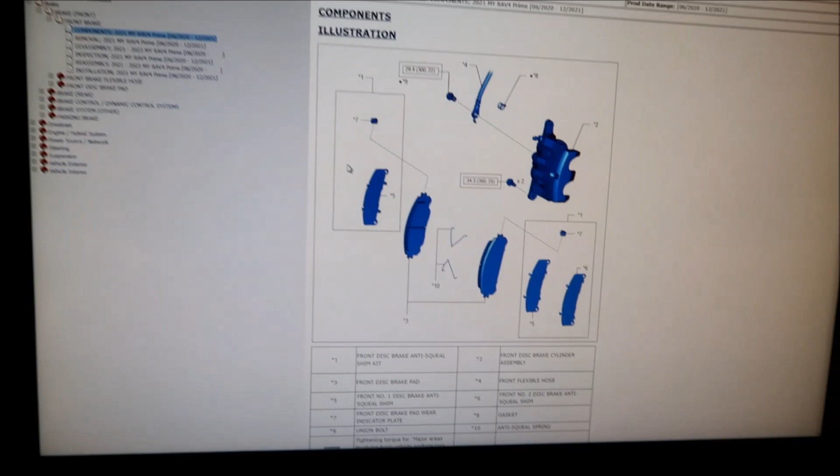I'm here in the Toyota TECHINFO website. So what I did is I did a 2-day subscription, alright, the most basic one. A 2-day subscription is like $20, about the price of maybe a Haynes or Chilton's book. And in my opinion, it's totally worth it if you take advantage of it.

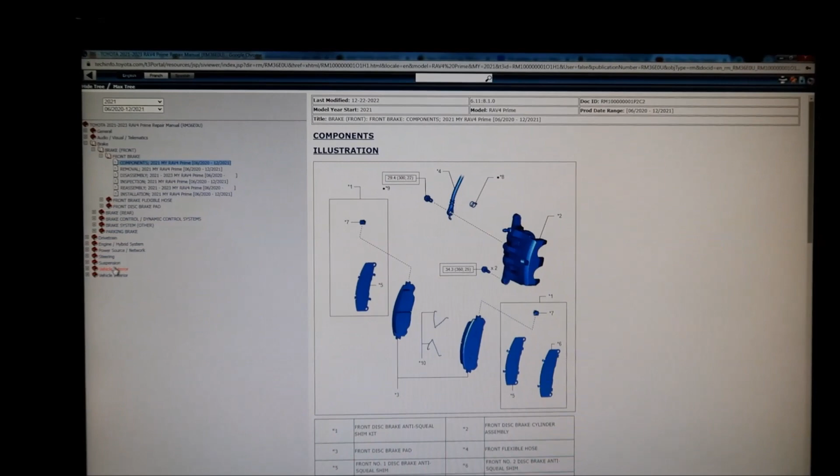Okay, so this is the repair manual for the RAV4 Prime. Right now I'm looking at the brake section - it just says brake, alright. So it's in the manual, in the brake chapter. So this is kind of how the repair manual works.

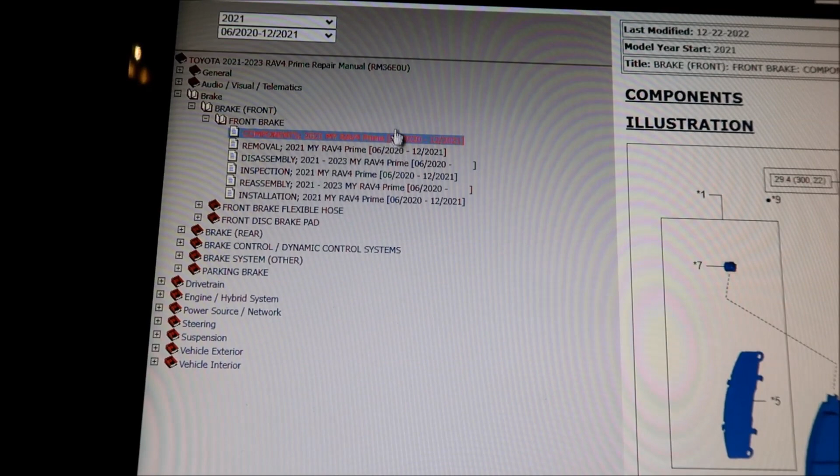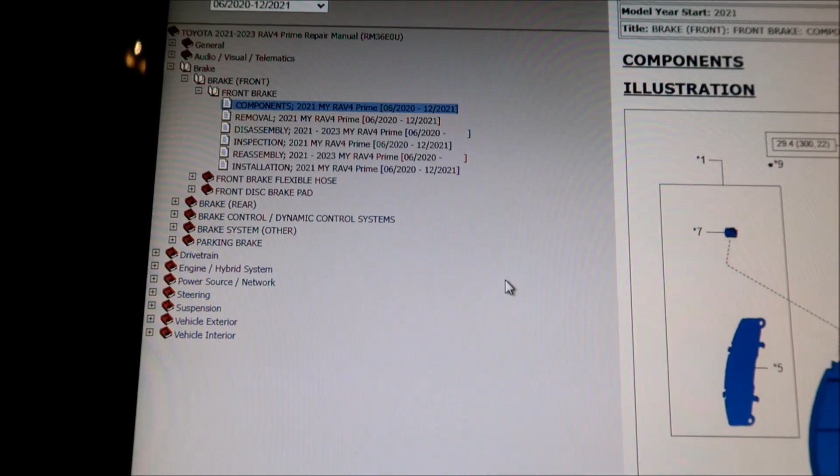So there's technical service bulletins, like supplemental manuals they made after they make this stuff. It also tells you from what years and stuff. So I'm logged into the 2021 model year RAV4 Prime, and that kind of goes from like the SE and the XSE premium package. There's a lot of stuff in here that, since I have the SE model, there's some stuff I don't have - like navigation, I don't have any of that stuff in there.

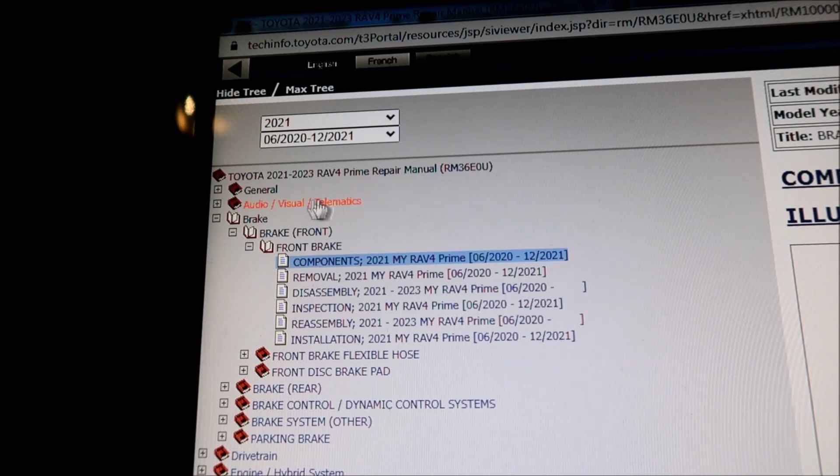But anyway, this is kind of how the manual works. It says Toyota 2021 to 2023 RAV4 Prime Repair Manual, that's where I'm at right now. They've got different tables of contents, very similar to a book. There's general, audio - so far I've gone through general, audio, and now I'm in the brake section. So I'm looking at the front brakes right now, and when you click on front brakes, generally it'll have components, removal.

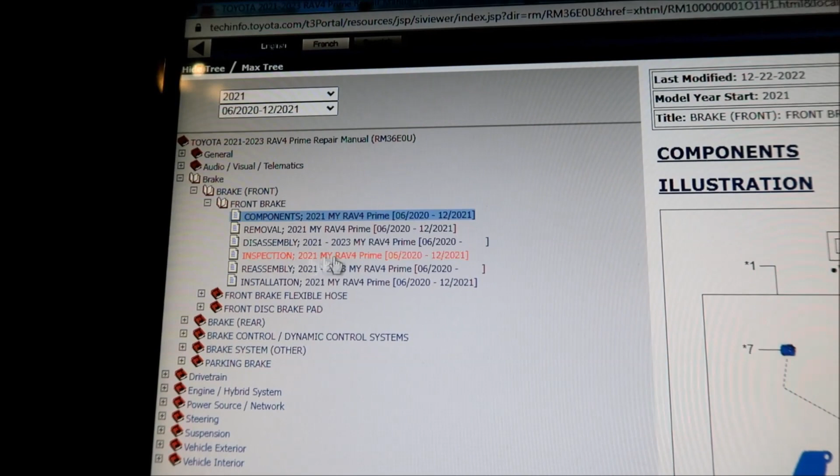Okay, this one has disassembly because you're going to take the calipers apart, and what the inspection is. Usually most of the stuff has three pages to it. One will be components, then the next will be removal, and the next will be installation, and there might be something like inspection. Okay, so let's go take a look at the front brake one.

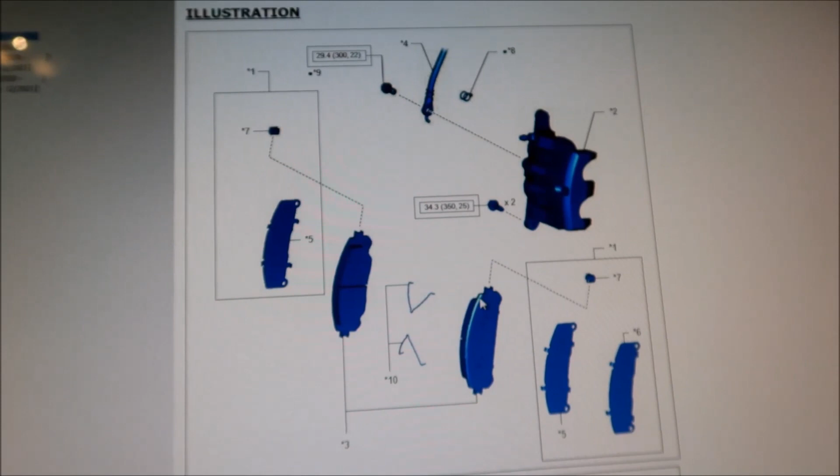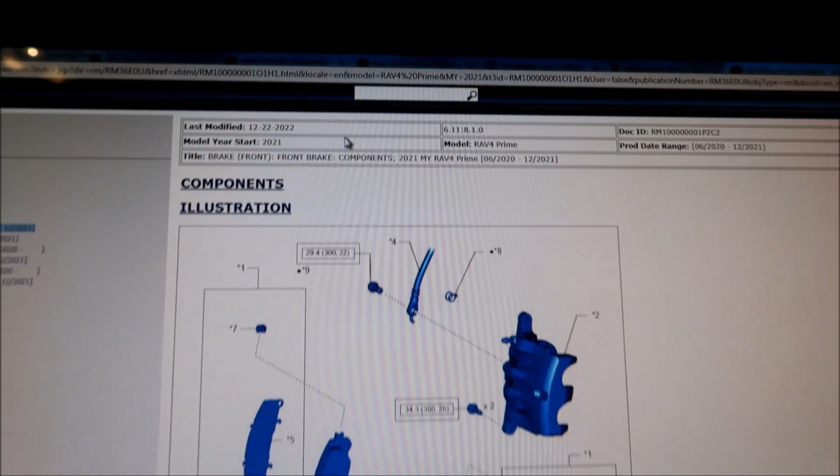So yeah, it has all the information about this, the page and everything. This was last modified on the 22nd of December 2022, like a month ago. Wow, I'm surprised, because I have the 2021 model. And here they've got pictures of the caliper. All right, nice, it's in blue.

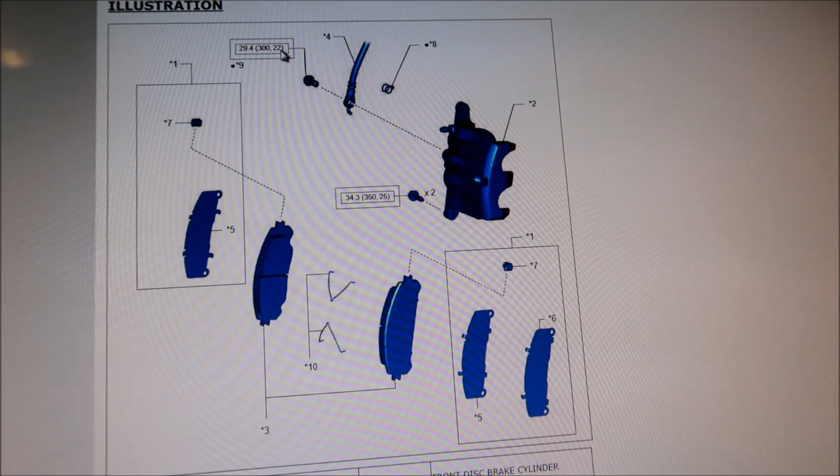It's interesting. So here we got the brake line, here's the brake caliper, and then here's the banjo bolt. All right, so then they have the torque spec right here. They've got it in three different torques, and I believe the one on the far right here is foot-pounds, and I think Newton meters is this one, and this one is some funky one. It tells you here somewhere.

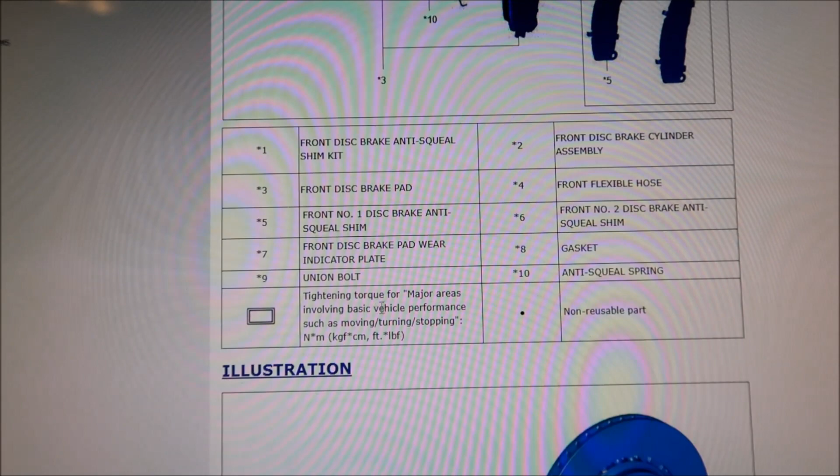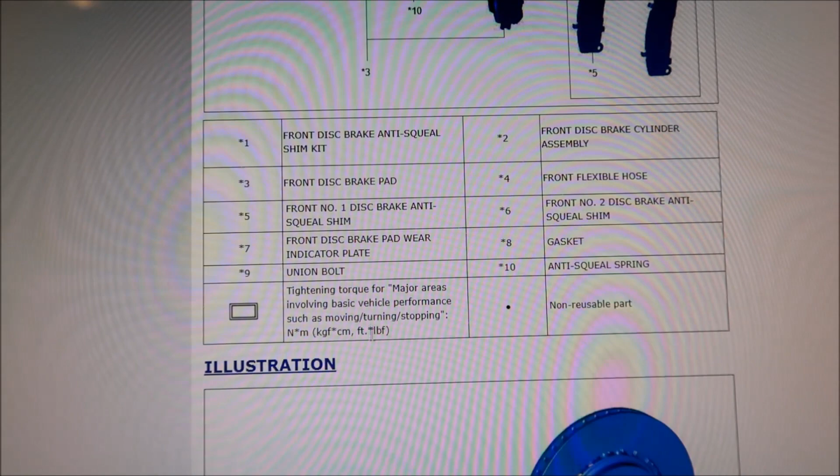Oh, right here. Tightening torque for major areas involving basic vehicle performance such as moving, turning, stopping. Anyway, the first number is Newton meters, the second is kgf. What's this? I don't know what that is - kgf-cm, some kind of weird unit. And then foot-pounds. In America we use foot-pounds and Newton meters, and inch-pounds if it's really small. Yep, there we go, that's the info I'm looking for.

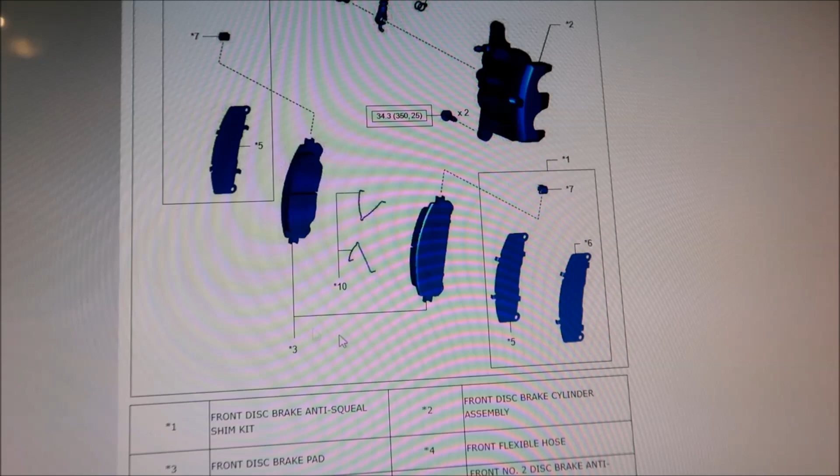And it's got a picture, and it's kind of got where everything is supposed to go. That's the banjo bolt, these are the caliper bracket bolts right here, these are the shims, and these are the brake pads. So pretty cool. And here we got one of the disc brakes. There's the caliper pins. These are the little - what are these, number 5? It's called a front disc brake pad support.

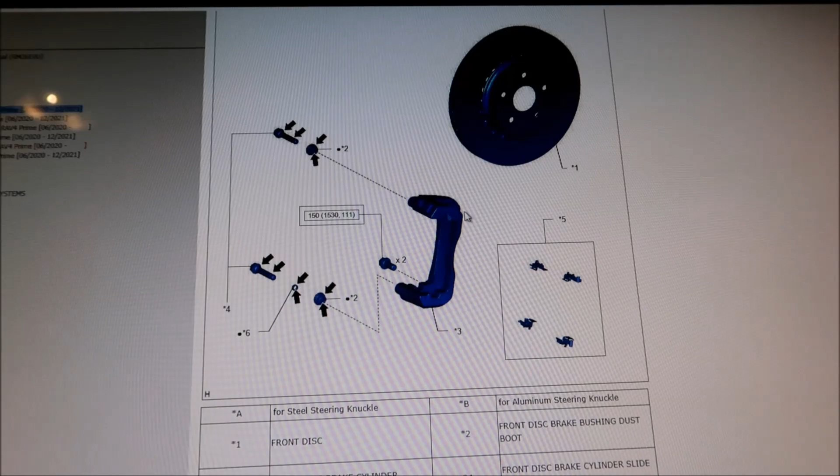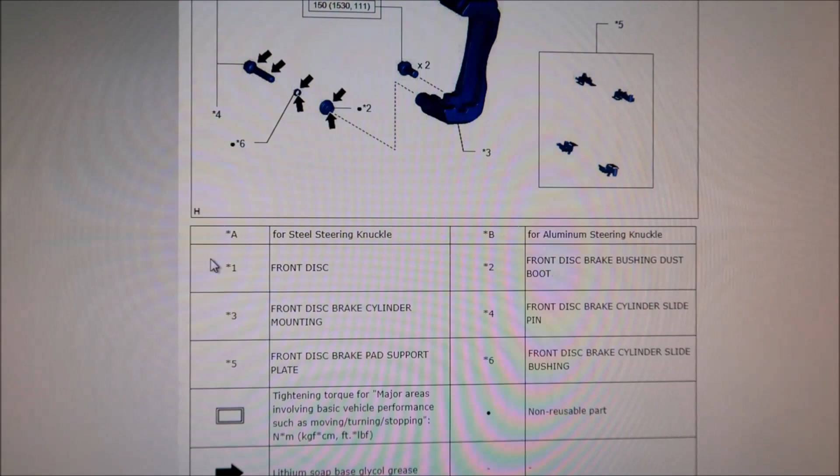So yeah, it'll have a diagram, and then it'll have, like it says here, number 1. So you'll look at 1, and that's called a front disc. It's too bad they don't have a parts list or something, but you can go to Toyota's website or your dealer website, and they'll have diagrams and stuff like that too. But they won't have torque specs like this. And that, like I said, that's what I'm going for.

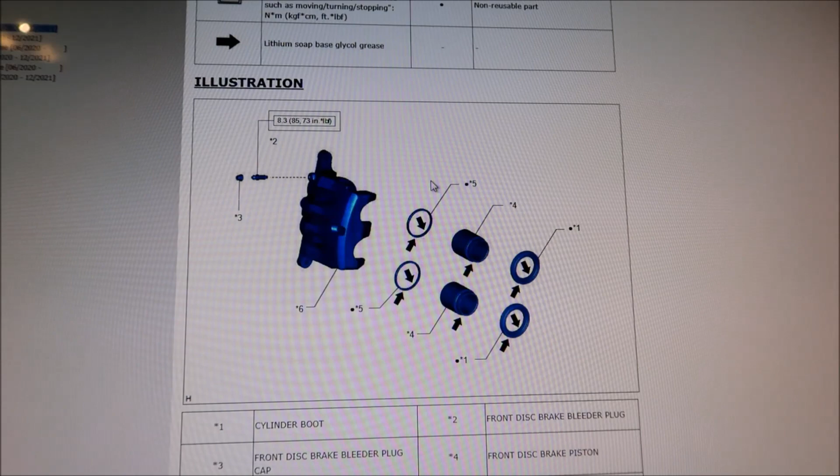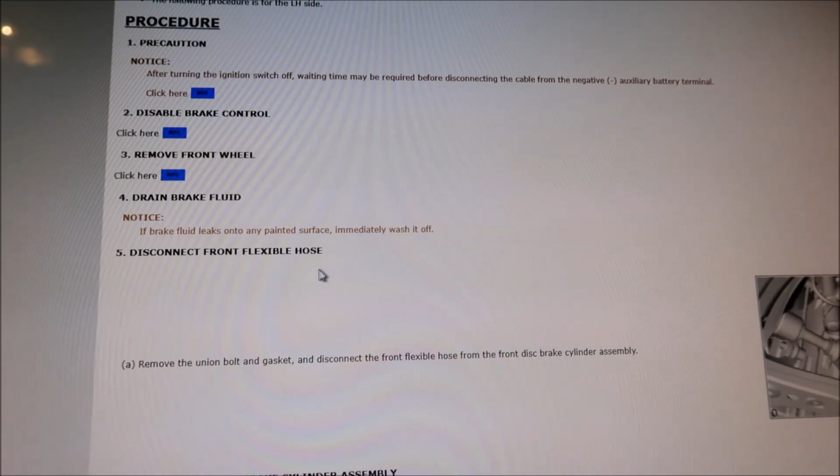Okay, this tells you how to take apart - it shows you a diagram of the caliper itself when you take it apart. This shows you how to remove it from the vehicle, so this is removal. And then a lot of these will have links to other parts. So if I click - I'm not going to click on it - but if I click on this, it'll tell you how to disable the brake control. It'll go somewhere else in the guide.

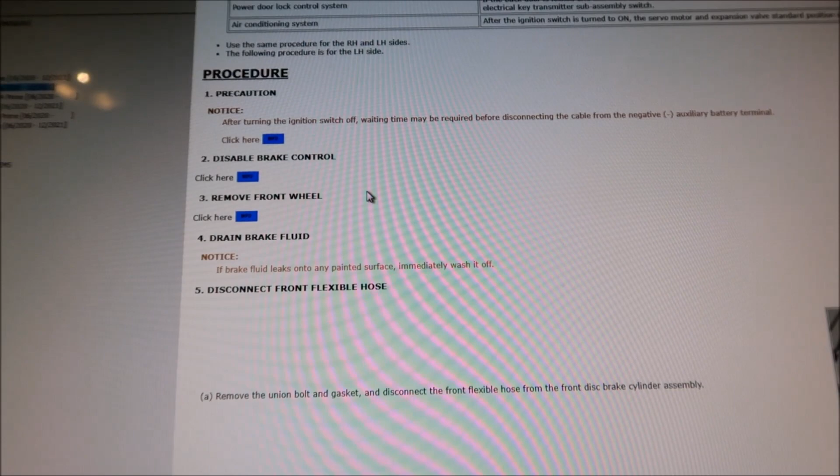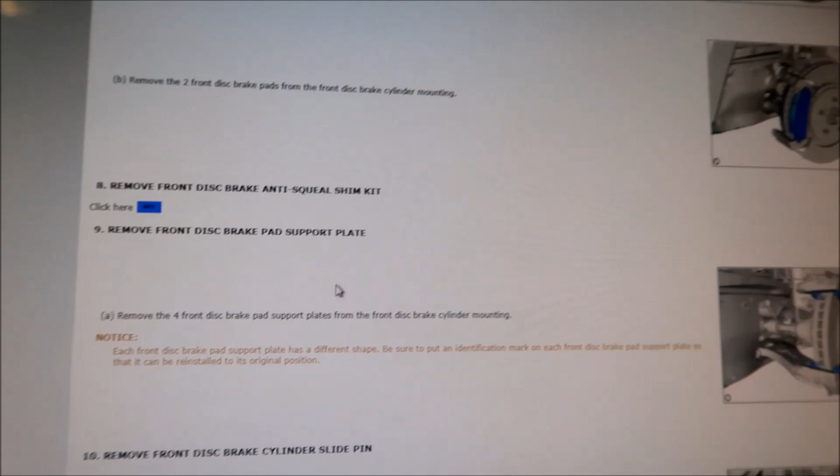Yeah, so how would I do that? Well, we would have to look that up. How annoying. Anyway, you would drain the brake fluid, disconnect the front hose, and hopefully we won't have any kind of problems with the brakes. But okay guys, so this is the step-by-step on how to remove it, and then this is how to disassemble the brake caliper, I suppose, the next one. All right, I would just buy a new caliper, man, don't bother doing this.

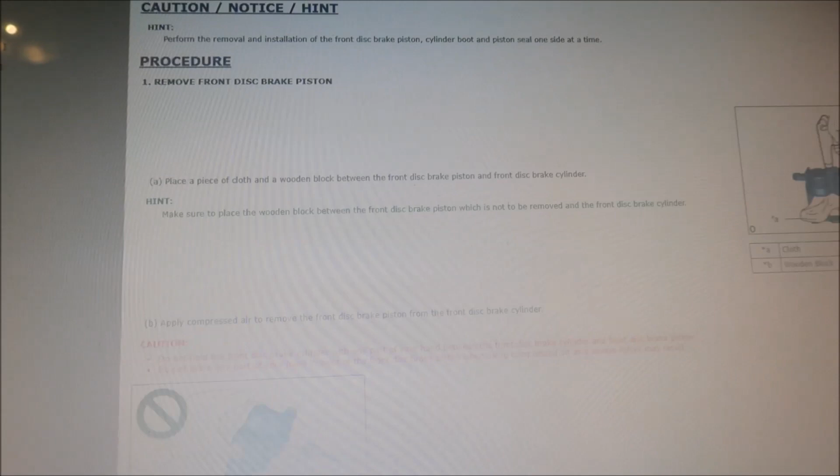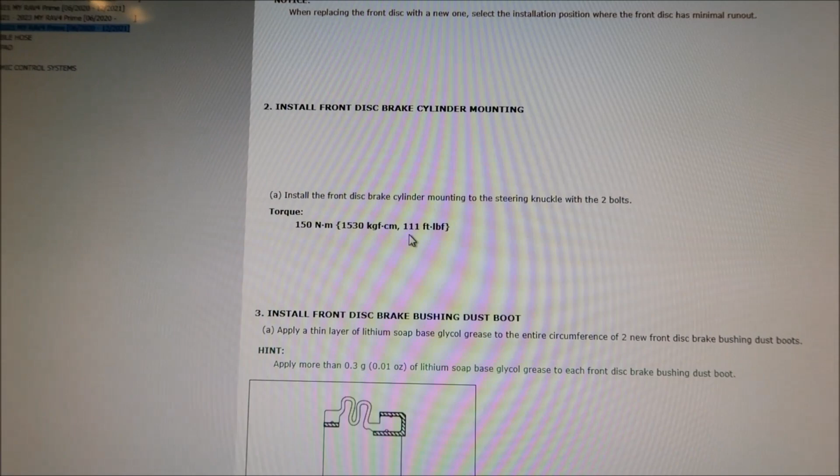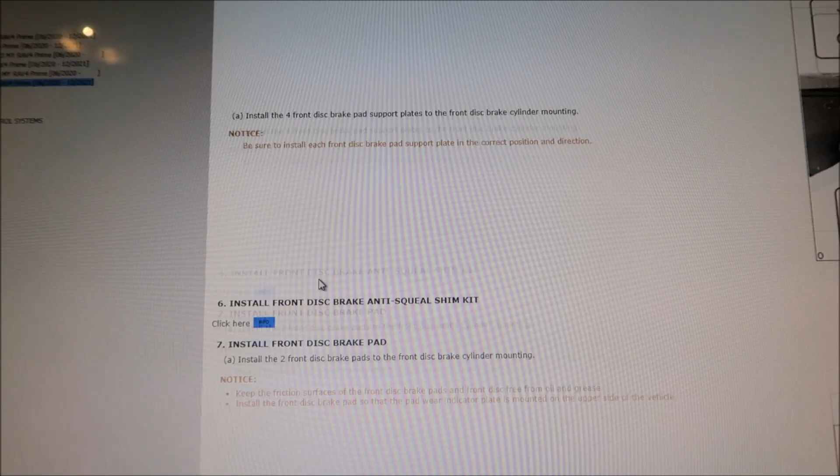So here's installation. Installation should have all the torque specs. Yeah, see, here's the torque right here. It tells you to torque the caliper bracket bolt to 111 foot-pounds. For real? Holy moly, that's a lot of force for the brakes. Holy crap, okay man. All right, if I snap one of those bolts, let's hope there's no typos in this manual. Okay, so here's another interesting thing about this, there's the specifications.

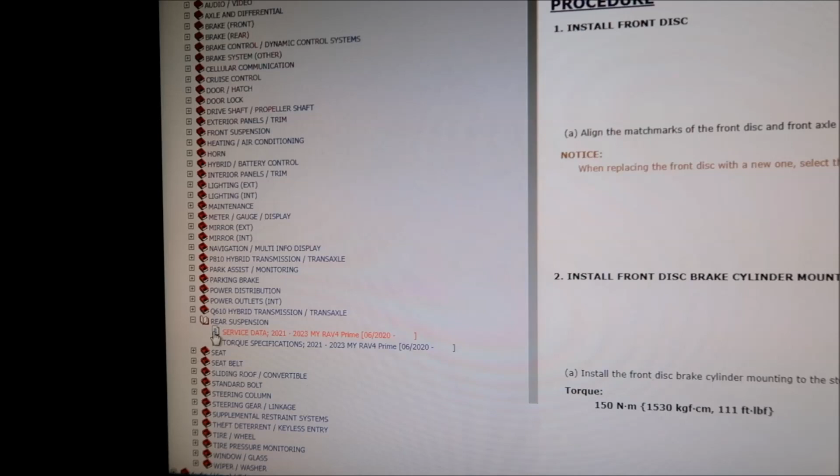All right, so the specifications has, let's go to rear suspension. We're going to go to rear suspension, and here they've got service data and torque specifications. So service data just kind of gives you some specifications on the data, like tolerances and how many ohms something should be. Or I have no idea what this is.

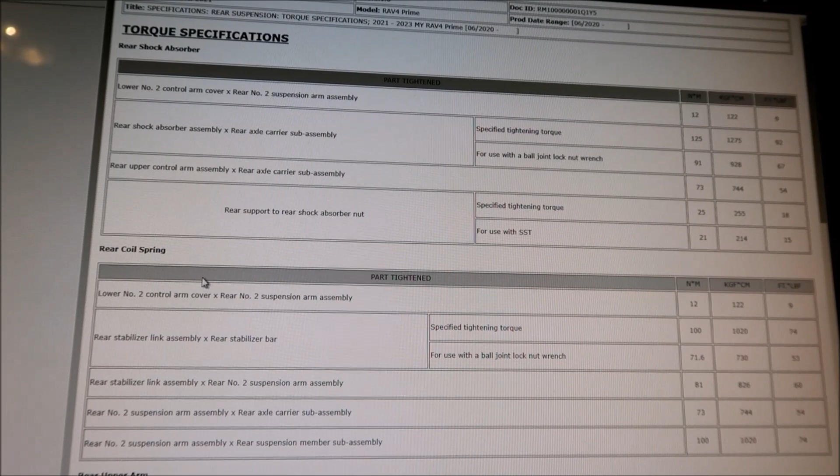This has something to do with the stabilizer link, and it looks like a torque spec, but the torque spec is the next one. Okay, and this kind of, there's no diagram, but it tells you what all the torque specs are, in Newton meters, kgf-cm, and foot-pounds.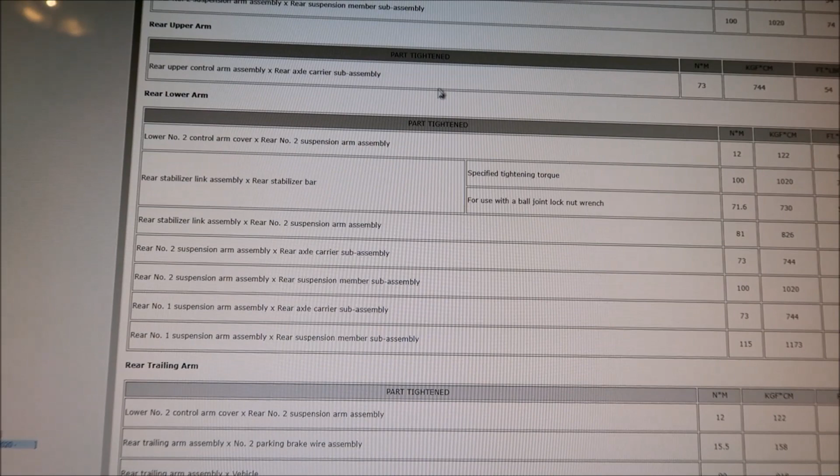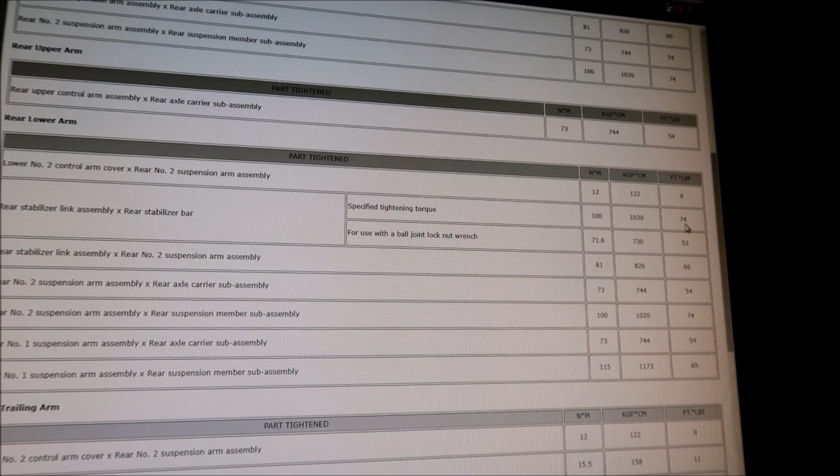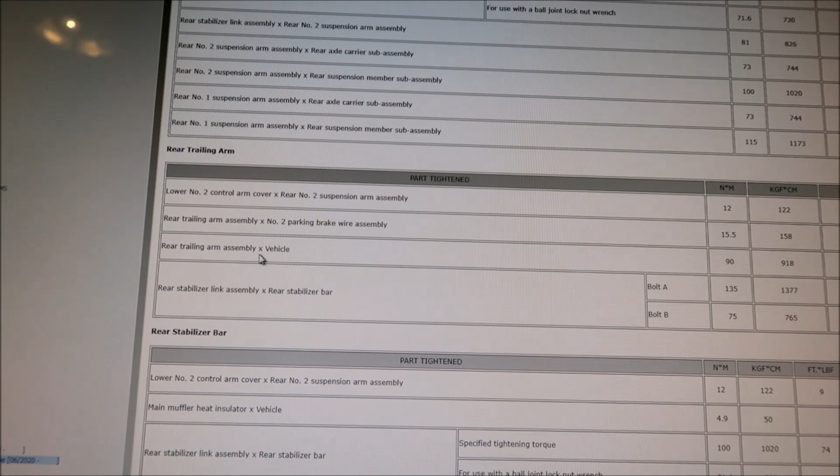Pretty cool. So if I want to look at the rear stabilizer link assembly, rear stabilizer bar, and then the specified tightening torque for the bar, I guess that's the brackets for the bar. Is that the linkage or the one? I'm not sure, man. Anyway, this is 74 foot-pounds, quite a bit. That's why it's nice to have a picture so you know what you're looking at. The rear trailing arm assembly is 66 foot-pounds.

All right, so there you go. Rear stabilizer bar, main muffler heat insulator, 43 inch-pounds. Inch-pounds, all right, not foot-pounds. So if there's an inch-pounds one, there'll be a different column for it. Very nice, it's very good, I like it. Hades Mega is totally nerding out on this.

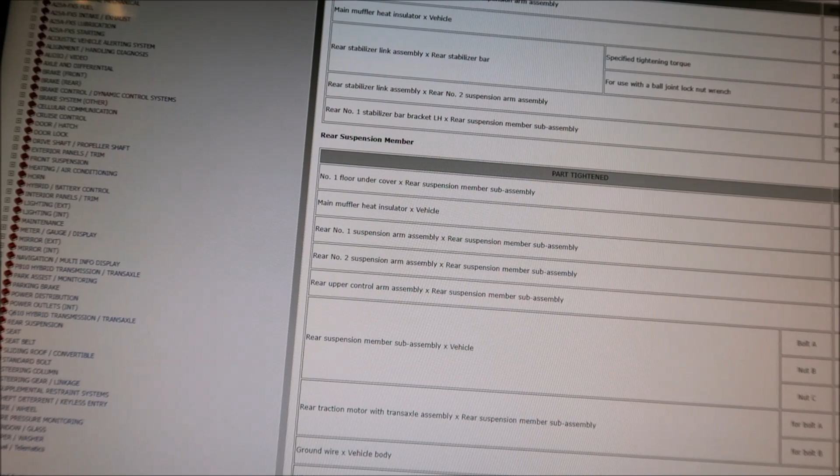And it's like that for a lot of them, like hybrid transmission transaxle. So this talks about the hybrid transmission, what kind of fluid you need, how many liters, 1.7 liters, Toyota Genuine ATF WS. Yeah, that's the good stuff right there. And then the seal, rear drive shaft oil seal, some specifications. All right, that's what that is.

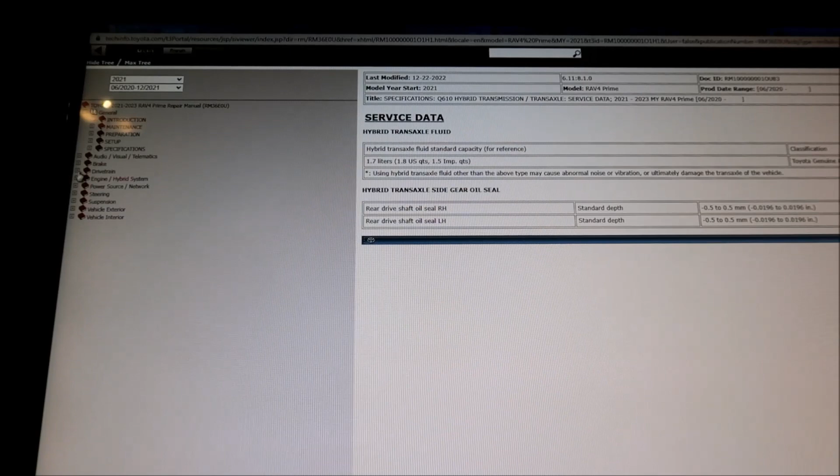All right, so I downloaded most of those, most of the ones that I thought were important. And then so like right now, where was I? I was on brakes. Yeah, we're doing brakes and then front. All right, so that's where I was.

Okay, and then so you can kind of get out of this. I hope I remember where I was. Oh, boop, boop, boop, boop. Oh, this just goes to the next one. It just goes up the tree. Okay, how do I get out of here?

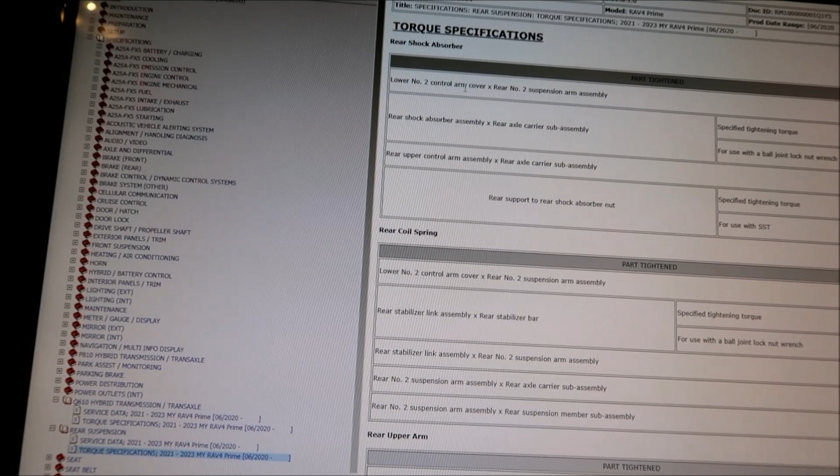If you want to download, that's what I'm doing. So what I did is I got the 2-day subscription. All right, and like I said, I'm downloading the brake one right now. So let's do that.

So I've got a directory up here. This is what I've been downloading so far. So we're going to do brakes. So I'm kind of downloading each page. I know it's freaking tedious. I wish I could just download one PDF file that had everything in it already, so I didn't have to do this, but they don't have something like that yet.

Okay, so for 20 bucks, I'll take my time and download everything that I need, because I plan to own my vehicle for a long time, and I plan to work on my vehicle as much as possible. Hades Mega is one of those DIY people, all right.

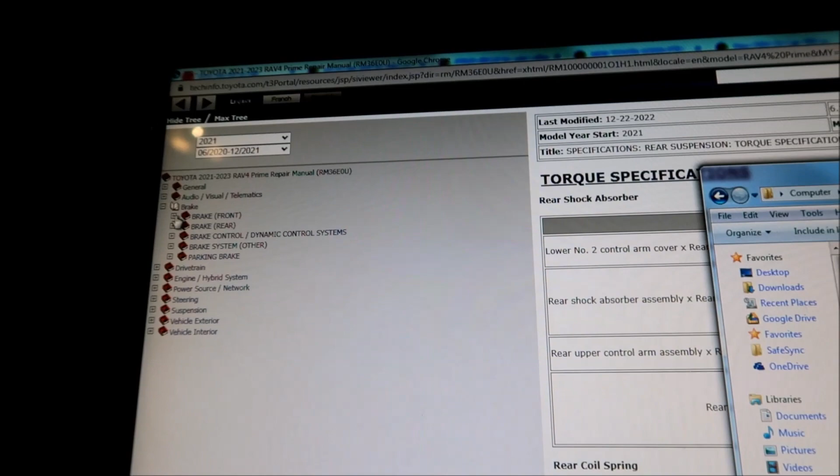Okay, so the next chapter is brake. So what I'm going to do is put 03 here, and I type everything in capital so I don't have to capitalize this and then lowercase that, I just make everything capitals. So the next one is brake, I'm going to put brake here. And then I'm going to go to brake front, so we're going to make another subdirectory called brake front. You don't have to do it this way, but that's the way I'm doing it.

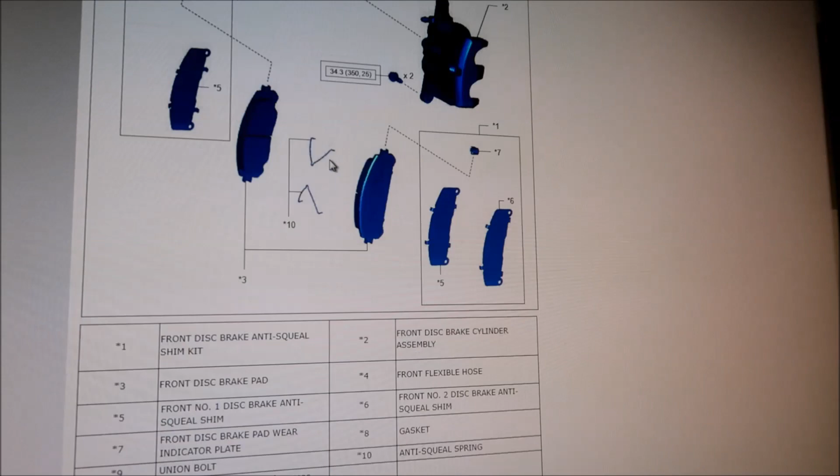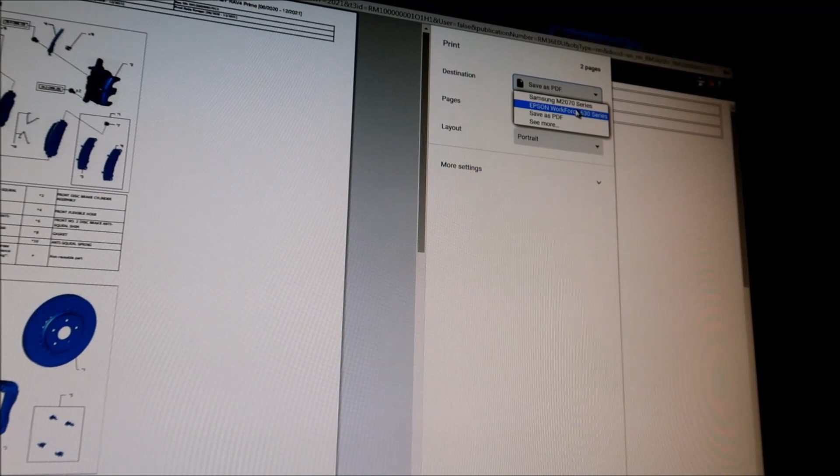Go in there, and then I want to download the components. So this is the component diagram for the front brakes. So what I'm going to do here is hit print, and you're going to have a program. I think I have Adobe Acrobat, or Chrome might do it. But I have it on, you hit print, and you go, see there's different printers here. I got a Samsung printer and an Epson printer. Well, if I print it to one of those printers, it'll print it, but if I hit save as PDF, it will print it to a PDF file.

So I'm going to hit save. It takes a little while for it to make the PDF. Okay, there it is. And then I'm going to go back, all right?

I'm going to repair manual, brake, front brake. And then this is the component diagram. So I have to rename all of them, guys. Yes, it's very tedious work. So for the first one, I put the number 01, and then I put components. That was the first one, right? I forget all the time. Components, hit enter, boom, saved. And then it should be there now. And then if I go to components and I click it, there you go.

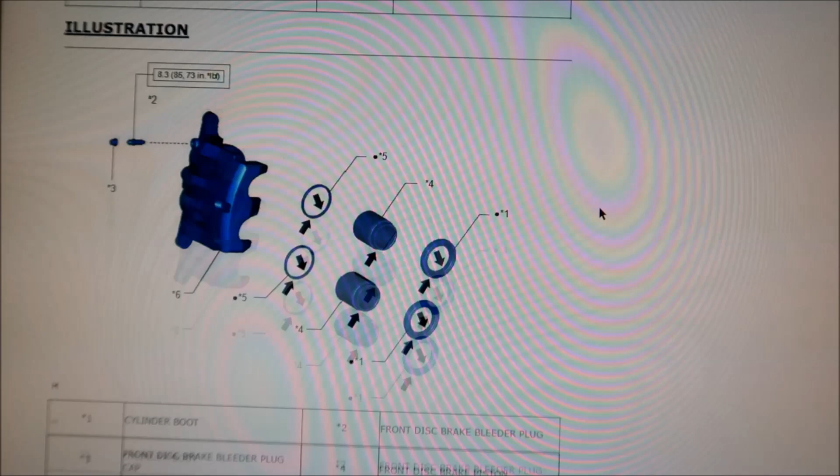I've got it saved on my computer. So if I need to print it out in the future, like let's say I'm going to work on my brakes, then I will just print this out, okay? Or I'll look it up on my phone. Pretty cool, that's how I do it. And I've done it for, I've got quite a bit.

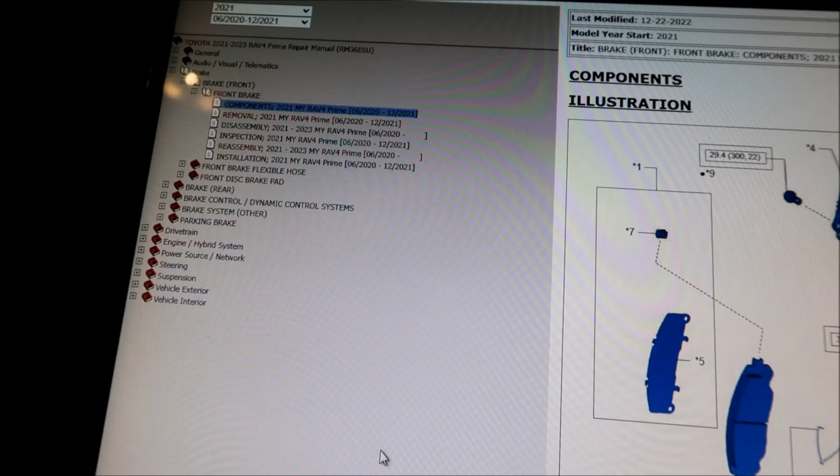I've done quite a bit of it already, but I'm like halfway there, guys. And I got like one more day left to download this stuff. So yeah, I'm working, and my mom has a Prius, so I might want to look at some stuff for a Prius also. But yeah, like if I wanted to look up something for my Previa, I could totally do it.

Okay. Oh yeah, so there's different years for the Rav4 Prime. See, so this is a 2022 Rav4 Prime. There's a 2023 Rav, but I want to go to 2021 because that's the one that I own, okay?

And then you could do it in French, Spanish. There you go, for you guys that speak Spanish, French, Spanish. Oh, it doesn't do Spanish. Oh, excuse me. Okay, there's a French and English. Anglaise, right? Sad that's how the French say English. Okay, so how do we get out of here?

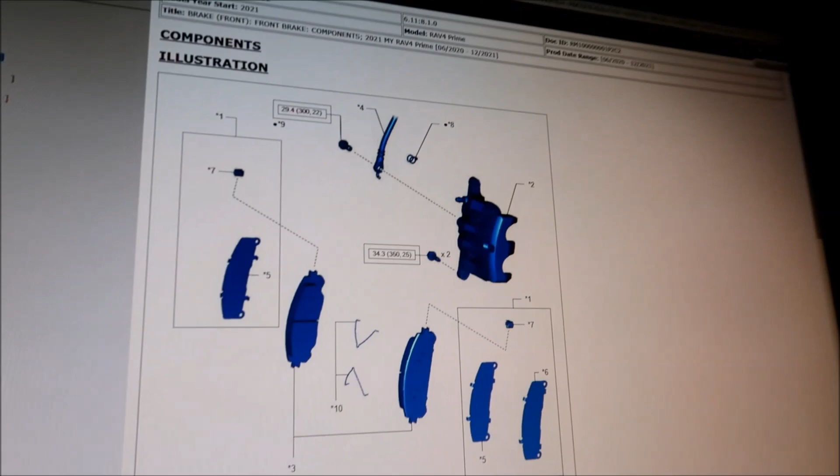I want to show you some other stuff, and then that'll be it. Oh yeah, so there's some other stuff you can do here. So this is the print button, like I mentioned, that's how I'm downloading it. All right, I guess I don't know. Is there any other way you can download this? You can do save as, I guess. Yeah, you might be able to save it as an HTML file, but I feel like a PDF is more, I think it's more better. So I'm saving it as PDF.

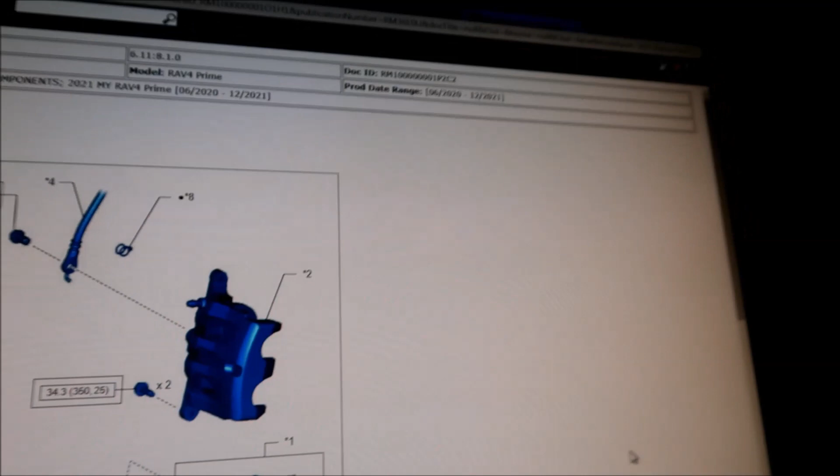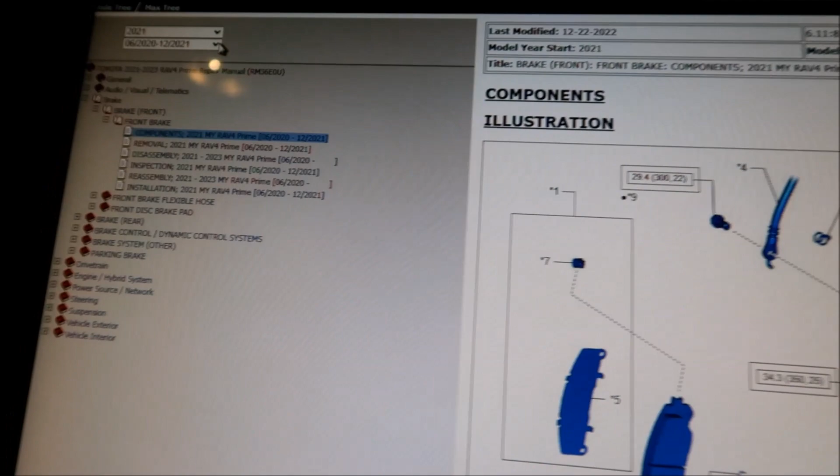You can, oh, there's an add to favorites here. You can rate this document. And then you can make corrections, all right? So yeah, like let's say somebody put the wrong torque spec or something, and you put the right one, right? Like, there's no way that I did that torque spec and it broke the bolt, type of thing, okay?

How do I get out of here? Let me figure out. Okay, so here's how you can find this website, all right? It's called techinfo.toyota.com, all right? I just typed it into Google, and I'm going to click right here. All right, and it's going to warn you about it not being secure and stuff, but it's a legit site, all right?

I'm just going to tell you that, guys, right now. It's a legit site. All right, see, they got stuff on the Supra right here. I think I'm already logged in, man. Yeah, there's a ton of stuff here, man. There's stuff on the BZ4X here. Stuff on the 2023 Crown Warranty. The 86 repair manual. Yeah, these are like some. So okay.

You're gonna click TIS here, okay, and then you're gonna look up your vehicle. All right, so Division Toyota. Oh, you can look up Lexus and Scion also. Okay, guys, it's all Toyota. Same stuff. Peace pipe, crack pipe.

All right, and then you're gonna say, let's say I have a Toyota Previa. Is that in here? Oh yeah, there is. See, there's a Previa. I had a 90, I think it was a 91 Previa. There you go. And then you're going to hit search. Boom, all right, and it shows you all the stuff for the Previa right here.

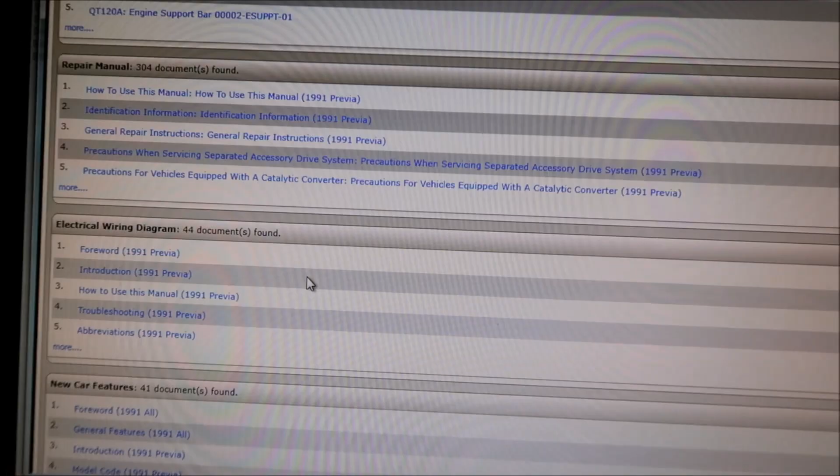Okay, so the first one is summary. It just kind of gives you a little bit of what all these tabs are. All right, so the first one is service bulletins, SB. All right, Mexico service bulletin. Okay, Canadian service bulletins. Quick training guides, that's what QT is, QTG.

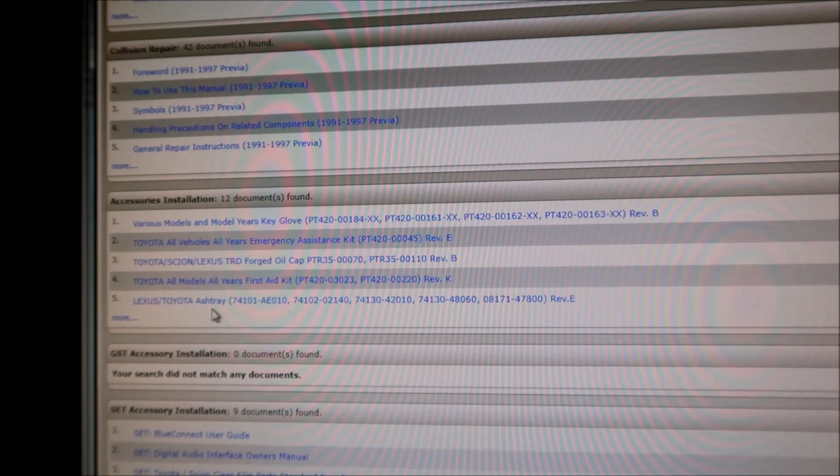If you want to learn how to do stuff, repair manuals. Okay, this is the important one. Repair manuals and electrical wiring diagram. Yeah, there's a lot of stuff in here, guys. It just, your mind will explode how much documentation there is for each of these vehicles. All right, so anyway, the one I went is RM, all right, repair manual.

Okay, and then you'll go to how to use this repair manual. Then it'll open up another window, just like I showed you last time.

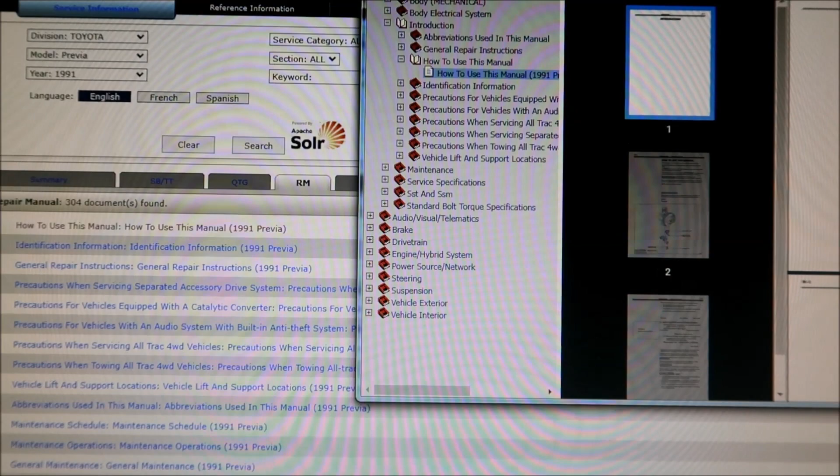All right, yeah, I just clicked one of those. I think there's another way to get there, but that's just what I did. I clicked on one of these and it opens up that window, right? And then you can look at whatever you want.

All right, let's say we want to check out the brakes on the Previa. Well, anti-lock—my Previa didn't have anti-lock brakes, but there you go. So here's some info on the Toyota Previa brakes: the brake booster, the front brake.

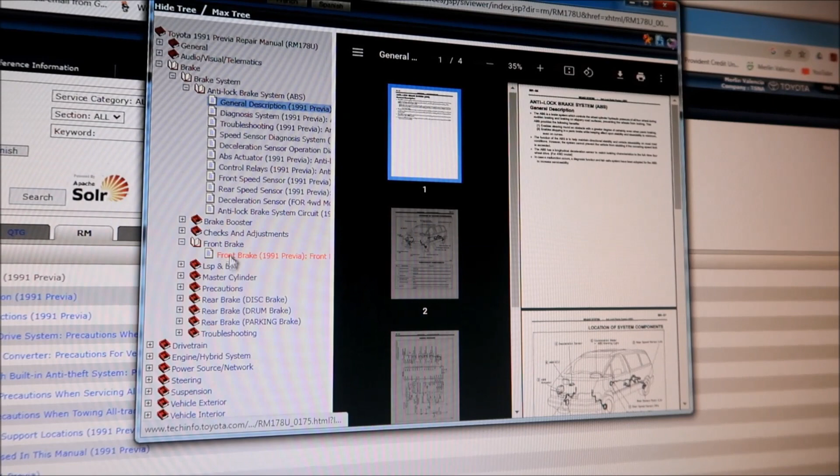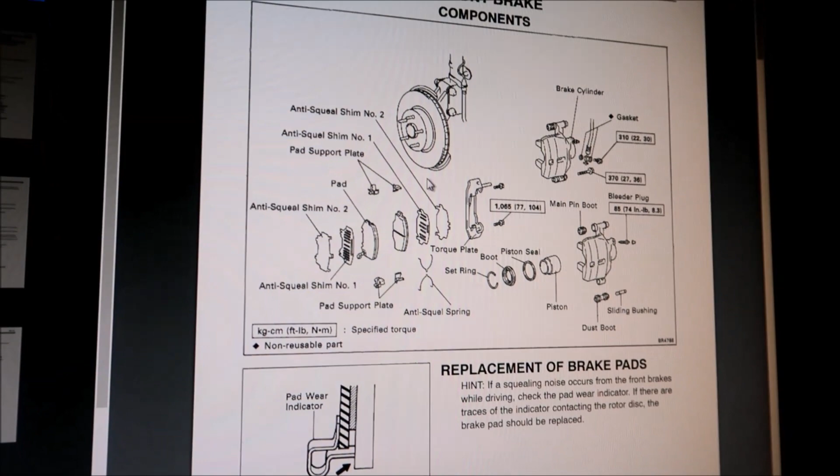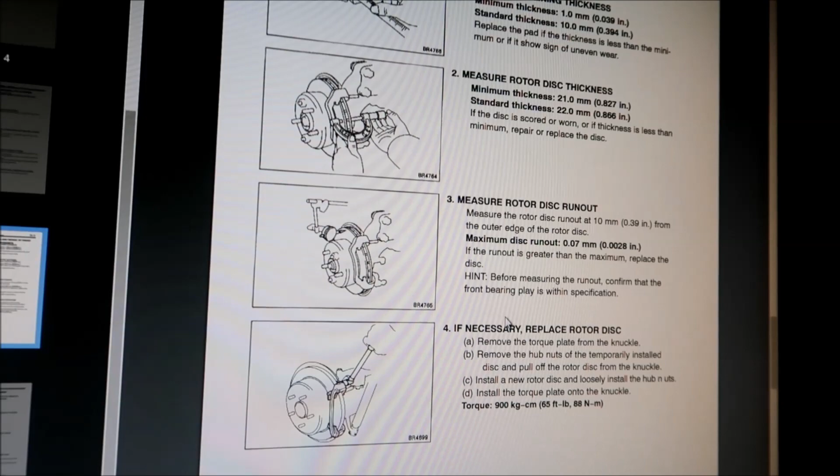Look at this, awesome. You can tell this is an old school Toyota, these are the old school Toyota manuals. So when you buy a service manual for Toyota, this is what it looked like back in the days. Remember, everything is all on the computer now, so they don't make manuals like this anymore. That's why it looks different than the RAV4 one. See, this is all the diagram. I actually kind of like this better, guys, but yeah, everything is all computerized now, so they don't do this anymore. That's pretty rad, I like it, man.

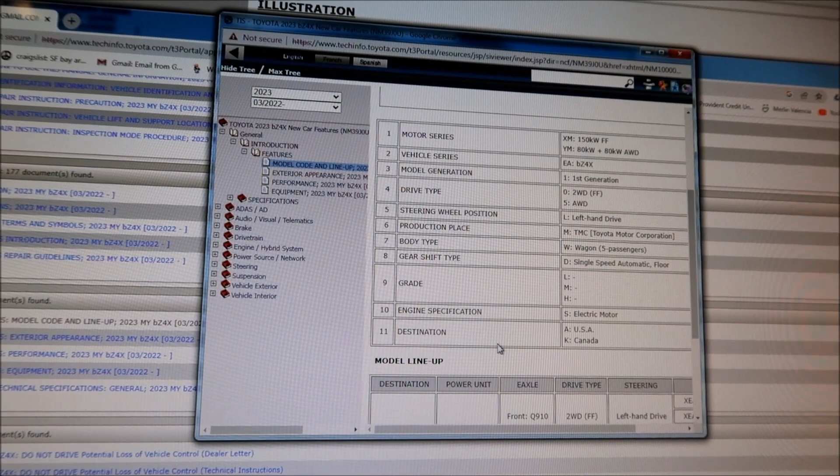New car features. Oh, this is a VIN number. All right, so this shows you the code for the VIN number.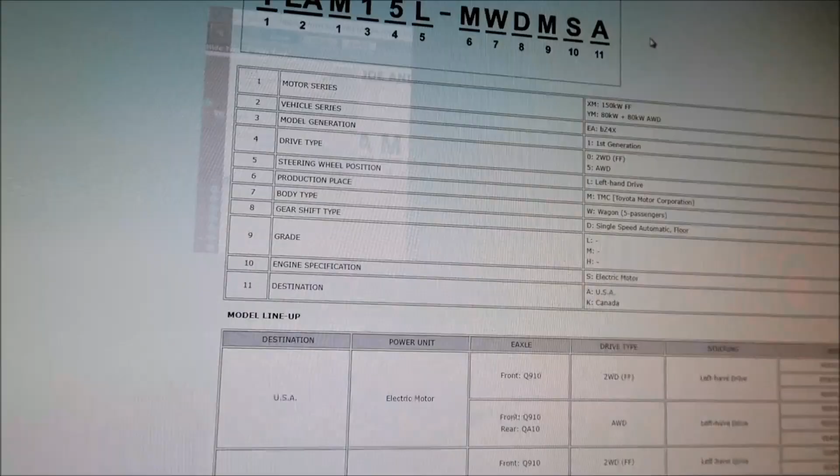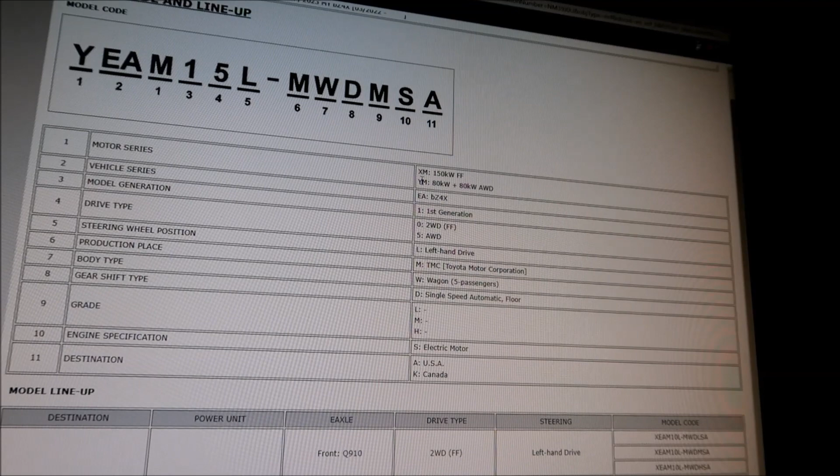So I'm totally nerding out on this. Number one, it could be an X or a Y. I guess it's X—I don't know why there's only one character here, but if you have an XM on your VIN number, you have the 150 kilowatt front wheel drive model. If you have a YM, you have the 80 kilowatt plus 80 kilowatt all wheel drive model. That's interesting, so it's exactly the same power front and back.

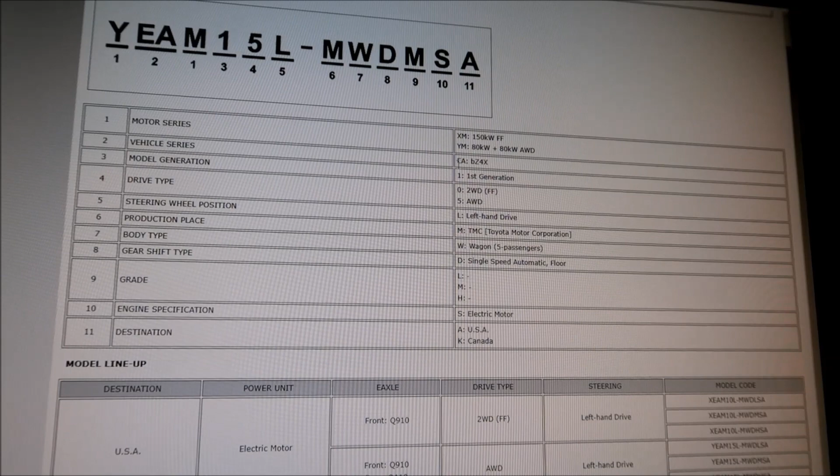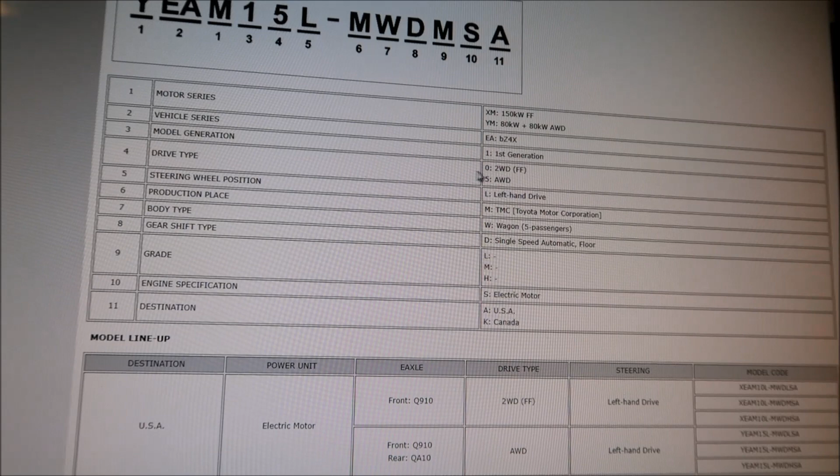That's nice. And then the vehicle series EA—that means it's the BZ4X. Model generation 1, this is the first gen, they only have the first generation, it just came out. The drive type: 2-wheel drive and all-wheel drive. If you have 2-wheel drive, you'll have a 0 on number 4. If you have all-wheel drive, you'll have a 5.

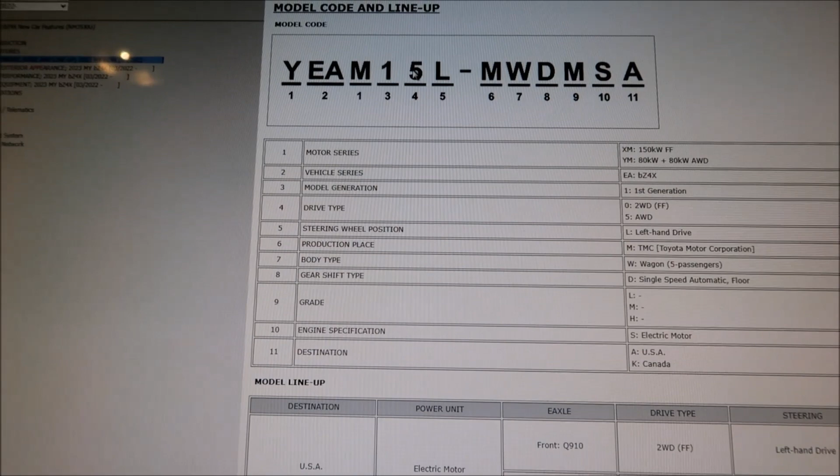So this one's an all-wheel drive, I think so. Yeah, so here's the example: Y, all-wheel drive, EA, BZ4X. This is an all-wheel drive BZ4X, that's the first generation.

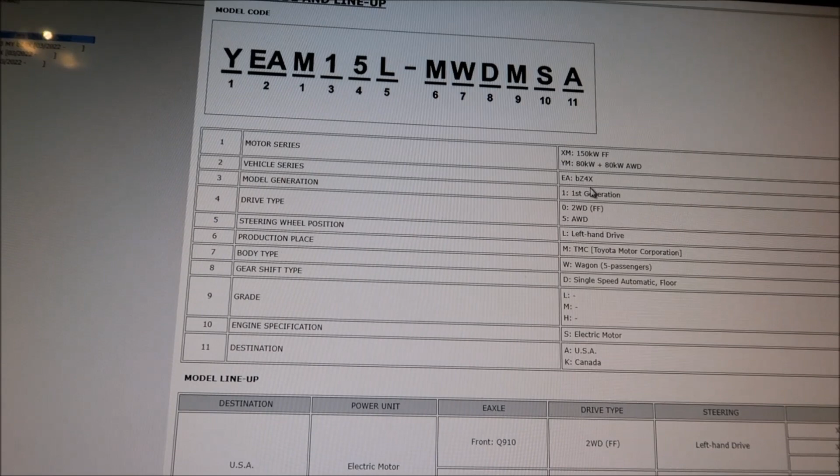What's this M here? Oh okay, I see, so yeah, this number corresponds to this number. So you have the Y and the M. That's kind of weird, but both of them have M, so I don't know—regardless, you're going to have an M here, okay. Yeah, that's the only weird one right there.

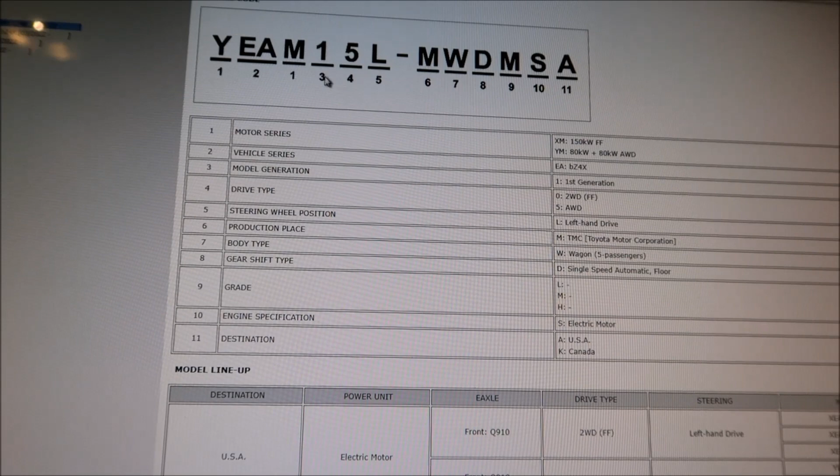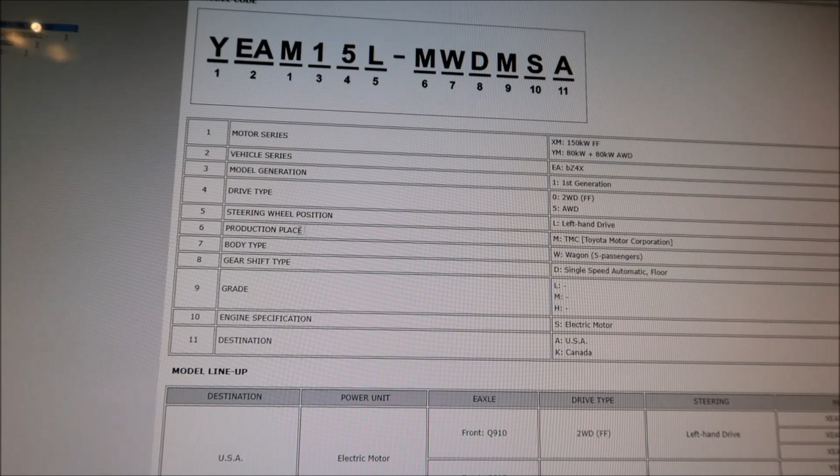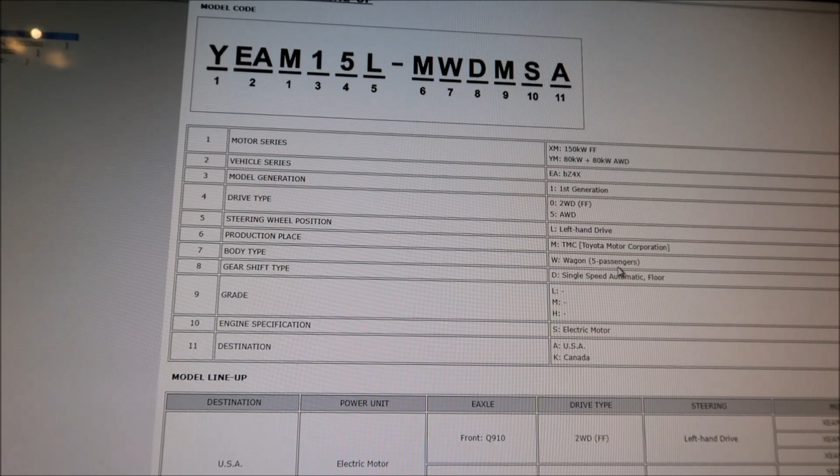And then for the third is the model generation, first. This is a first generation all-wheel drive BZ4X with left-hand drive, because it's L—left-hand drive. And then 6 means it's produced at the Toyota Motor Corporation, I don't know where that is. It's a wagon, 5-passenger, 7W. Okay, there's only one—it's a single-speed automatic.

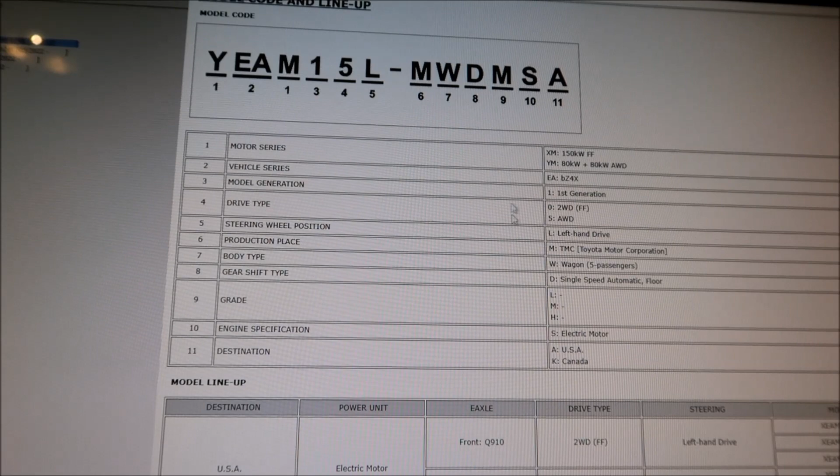Grade—what is this, is there a 9? A grade M, there's nothing on here though. Engine specification S means electric motor, and 11A means it's American, okay, so for USA.

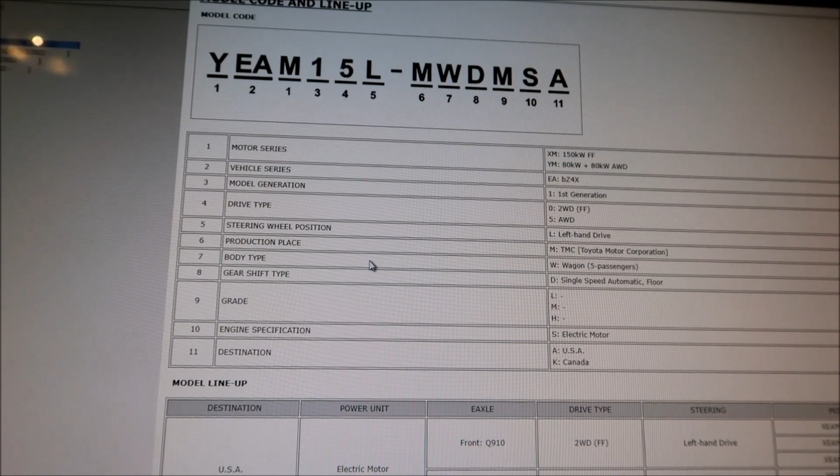Got it, alright cool. Yeah, so I'm telling you, there's a whole bunch of stuff you could nerd out on, guys, this is BZ4X, okay. That's pretty cool. Oh yeah, they have accessories—I'll show you this RAV4 Prime accessory here real quick. There's all sorts of stuff you could nerd out on here, guys, I'll tell you.